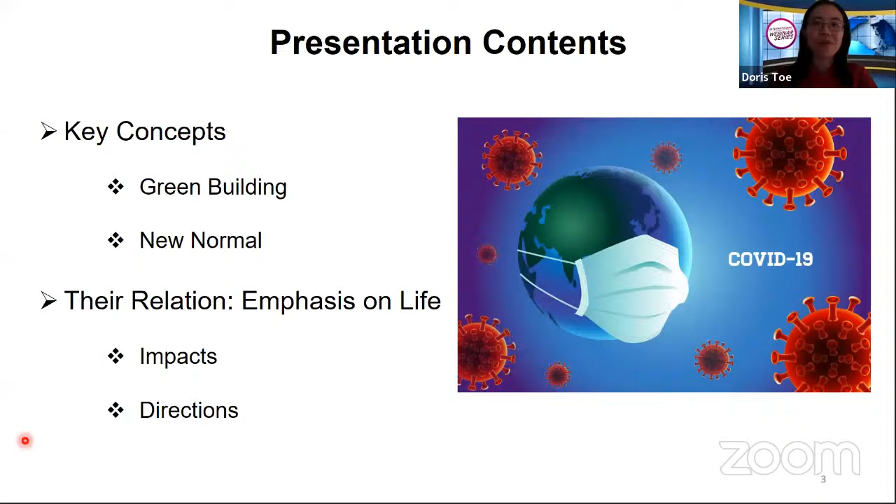According to the World Green Building Council, a green building is a building that in its design, construction, or operation reduces or eliminates negative impacts and can create positive impacts on our climate and natural environment. I think the second point is also very important: green buildings preserve precious natural resources and improve our quality of life.

At the end of this presentation, we will see that quality of life shall be an integral part of green building. So now, if we are asked to name a green building, what building comes to your mind first?

The World Green Building Council also outlines the features of green building, summarized here. I think the first few points we are very familiar with, including the efficient use of energy, water, and other resources. We can use renewable energy such as solar energy.

I would like to extend here that the use of renewable energy from solar energy actually covers everything, including if we naturally ventilate our building, we are actually using wind power freely, and the wind is actually generated from the sun.

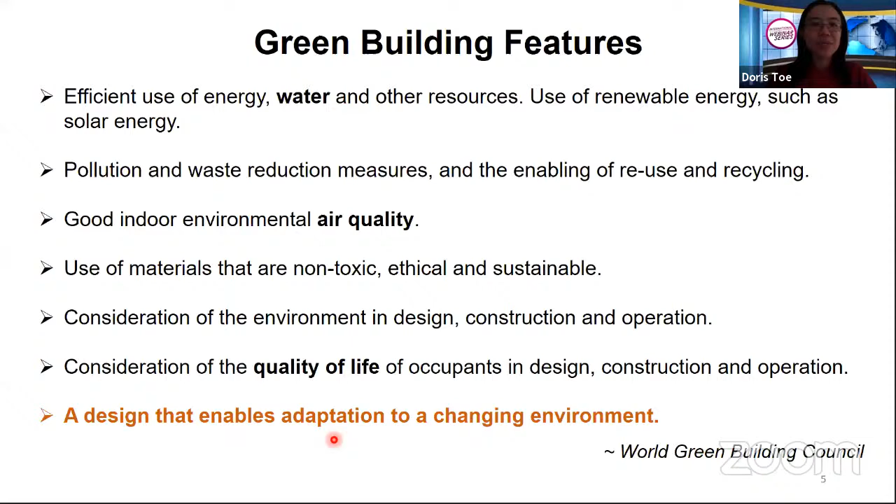On this slide, the picture on the left is interesting - it's the cover of a book, The Living House: An Anthropology of Architecture in Southeast Asia, showing a traditional house of Indonesia. I would like to point out that the way of life of local people since the past has actually portrayed the features of green building.

For example, the use of materials, how it is very much in harmony with the environment, how the people know their way of life and build according to it. In this photo, they are moving a house, probably to adapt to a better environment. The figure on the right is in the Philippines, showing children who look like they're playing, but actually they are preparing soil material which can become a building material to build their house.

So needless to say, this portrays or is in line with some of the green building features as explained in the previous slide.

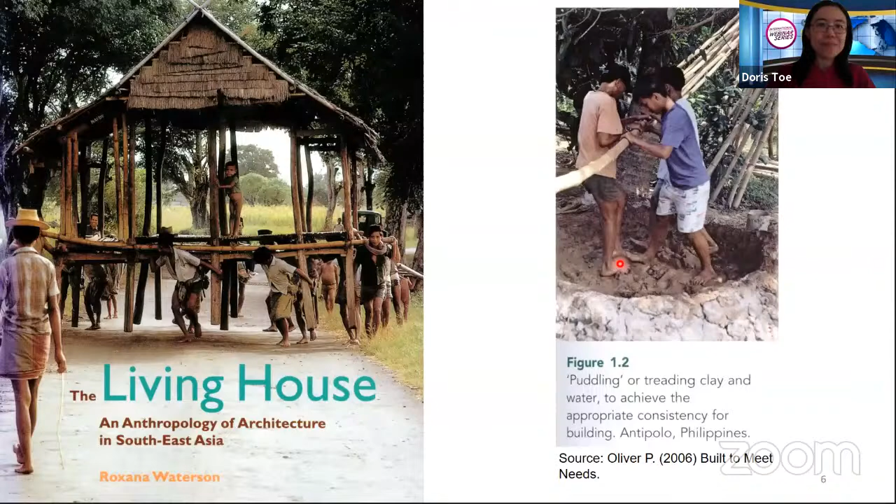Now I would like to highlight further from the World Green Building Council the key concepts of green building. The World Green Building Council says that any building can be a green building. However, it is worth noting that not all green buildings are, and need to be, the same.

This means green buildings are actually diverse, and diversity is a part of the richness of our world. Different countries and regions have a variety of characteristics such as distinctive climatic conditions, unique cultures and traditions, diverse building types and ages, or wide-ranging environmental, economic, and social priorities, all of which shape their approach to green building.

Following from here, may I derive that context and vernacular, meaning native, become a very important reference then.

Here is a world map which shows the Köppen-Geiger climate classification. As we are probably quite familiar, we belong to this tropical belt. Our area is here, and we are actually under the type of tropical climate, which comprises tropical rainforest, tropical monsoon, and tropical savanna. So in total, the Köppen-Geiger climate classification divides the world climate into 5 major types.

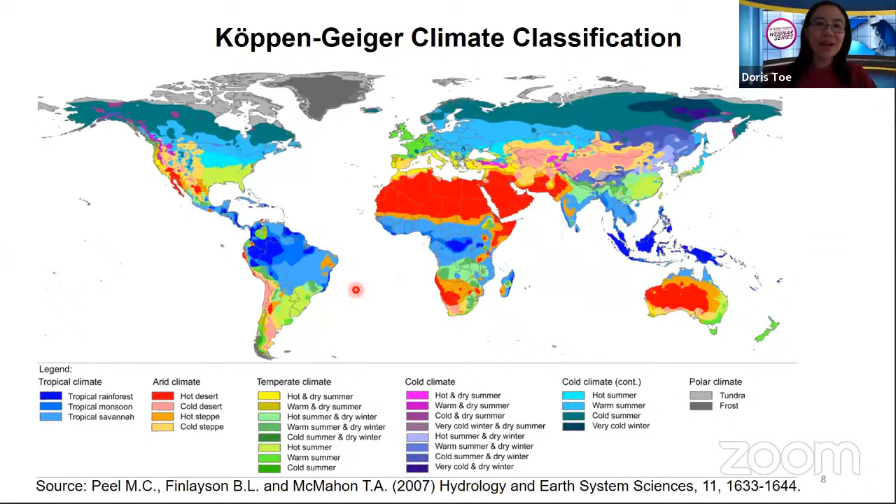So actually, if we take the 2 major influencing factors, which are climate and culture, we can actually see an outcome of a very rich architecture form, especially in the vernacular or traditional buildings.

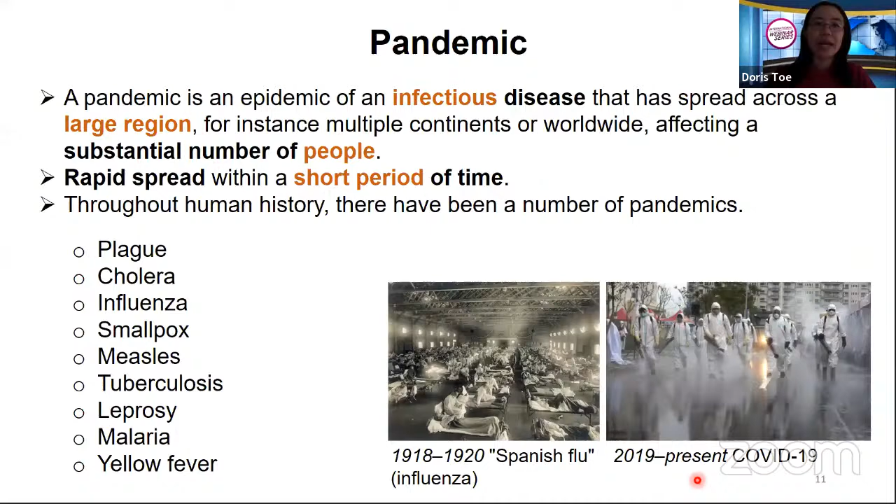And currently we are facing the pandemic of COVID-19. So the occurrence of COVID-19 actually led to our current day new normal life. So what does it mean? Having a new normal life basically means that we have to adapt to fundamental shifts to our way of life.

So for example, in Malaysia, we practice 3W and 3C. 3W meaning wash, that means hand wash, wear a face mask, and then warn, which means that we keep ourselves alert to warnings given out by the government or authorities. And then we have to prevent ourselves from 3C, which includes crowded place, confined space, and close conversation.

So besides that, we have to practice social distancing and queuing in public areas, for example at entrances before we can enter into a building. So this practice could be quite common, occurring in many countries today.

And besides that, we are experiencing a prolonged indoor living. In fact, actually modern way of living makes us stay a lot indoors, but under today's new normal life, our indoor living time is actually prolonged. For example, we are working and studying from home, and we also have more and prolonged online tasks.

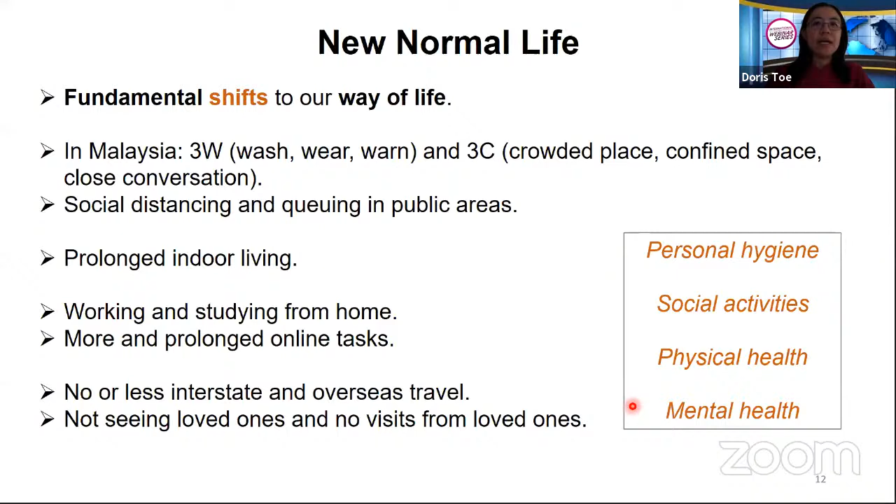At the same time that we are faced with COVID-19, we shall not forget that there are ongoing world challenges, for example climate change, and also housing billions of people in culturally and environmentally sustainable ways. It is estimated that vernacular dwellings constitute about 90% of the world's total housing stock.

If people are staying indoors a lot, and we are concerned that disease and climate change do not recognize boundaries, then it is essential to support vernacular building traditions and assist local buildings in terms of sanitation and disaster preparedness.

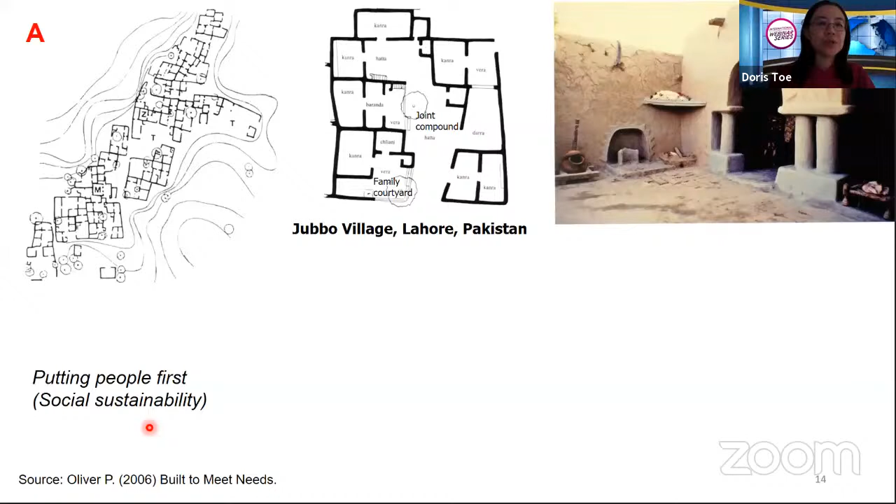Next, I would like to draw attention to the fact that putting people first in green buildings, the aspect of social sustainability, should not be neglected. Here I show two examples from the book Built to Meet Needs by Paul Oliver.

In the first example, example A, it shows the Jubbo village in Lahore, Pakistan, while example B is in Anatolia, Turkey. Both of these are housings or dwellings, and both are rebuilt houses after the place faced a disaster. However, in example A, the village was rebuilt back to its original form, while in example B, the new village was well planned, formal architecture and design.

However, a major difference is that in example B, although the new houses were completed, they remain uninhabited post-disaster houses. The households who were victims of the disaster refused to move in, although they were given these houses. Why? Simply because these houses could not meet the needs of the households, while in example A, the inhabitants could meet their cultural needs as before.

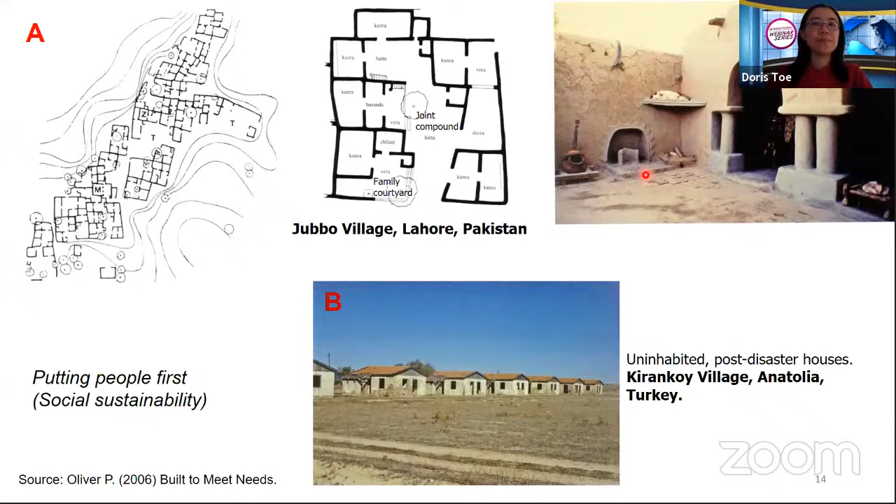Let's move on to the second part, which is very important. Now we will look into the relation between green and new normal.

The United Nations Chief Antonio Guterres said in his message that nature is sending us a clear message: we are harming the natural world to our own detriment. With the population doubling over the past 50 years and the global economy growing fourfold over the same period, the delicate balance of nature has been disrupted, creating ideal conditions for pathogens such as COVID-19 to spread. This was a message given on World Environment Day this year.

Meanwhile, the UN Environment Programme Chief Inger Andersen stated that healthy people and a healthy planet are part and parcel of the same continuum.

Therefore, the question of green building is not whether we need green buildings or not, or how many green buildings we need, but rather how shall we approach or realize the making of green buildings. In other words, it is about what direction we are going, and whether we have the directions for everyone or every kind of building.

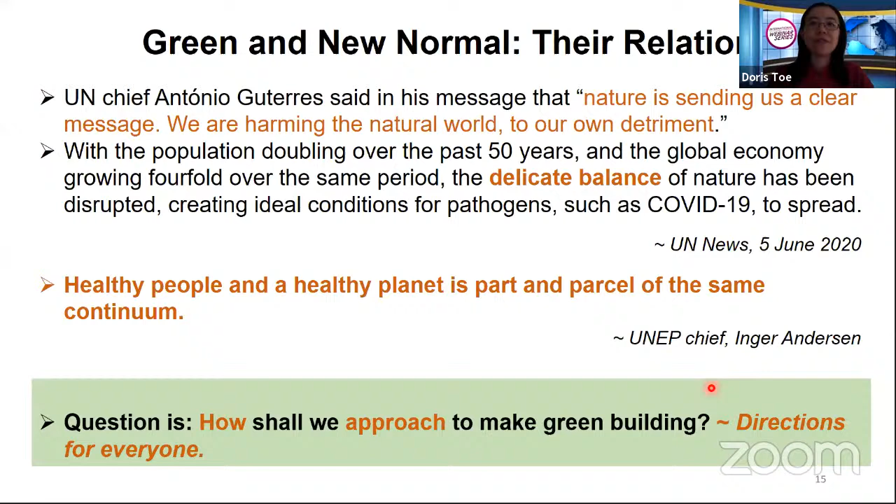Following the way of new normal life, a very major impact is the question of healthy living environments. For example, green buildings, just like the green building features outlined before, a very important feature would be having a hygienic environment and access to clean water. The next point is to have clean air and sufficient ventilation, for example for the purpose of contaminant removal. Another point would be about giving comfort to occupants, because we are staying indoors for prolonged periods.

So here I take the point of importance of ventilation and give two examples. The first is actually very old architecture, about 500 years ago, in Hyderabad, Pakistan. Although it is low-rise small buildings, the environment is actually quite high-density. We can see a very common and significant feature in this picture: it shows the wind catcher that every house has, and the wind catchers all face the same direction, facing the wind direction.

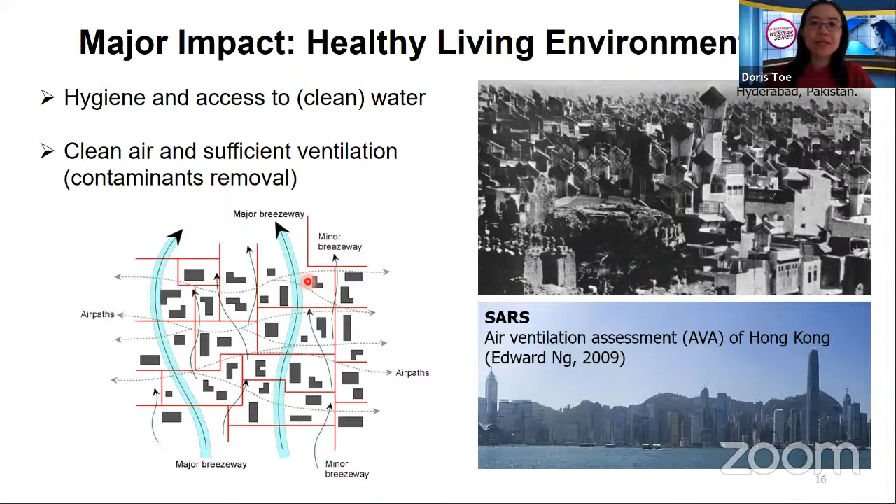Another impact on our healthy living environment is to make sure that we have green and open spaces to get a dialogue with nature, due to effects of prolonged indoor living on mental health, such as anxiety attacks and fear. As we might or might not be aware, elderly generations actually face such effects of anxiety, attacks, and fear as an outcome of the COVID-19 pandemic.

So it is pretty much known that green and open spaces can have a positive impact on our healthy life, not only in terms of physical health, but also psychology or mental health. This leads to the importance of indoor-outdoor relationship in our building spaces.

For us in the tropical climate, this has been part of our way of life since our forefathers' time. We live very much in connection with our outdoor environment, if we look at our forefathers' houses, for example. This indoor-outdoor relationship in buildings can be enhanced a lot if we have transitional spaces.

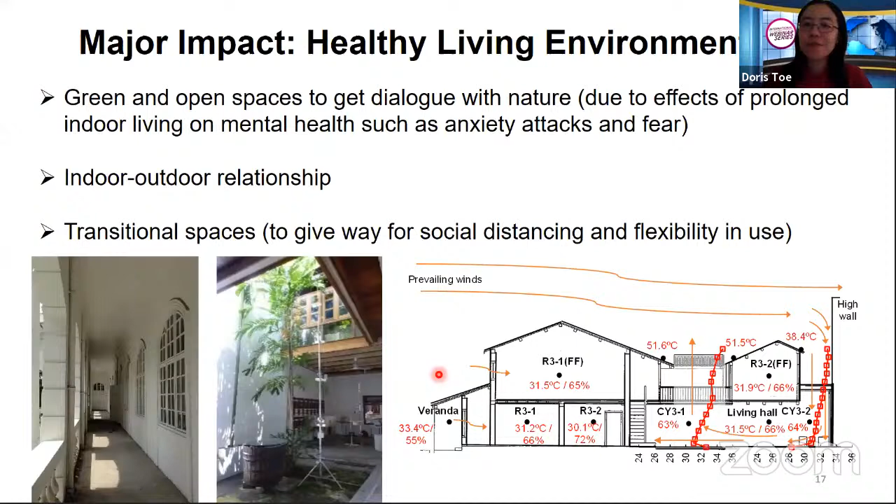There are also other impacts at a larger scale. For example, we might be concerned with proximity to supply chains and workplace from home, and also security in any emergency, such as our access to food and so on.

And another impact is reverse migration, whereby many urbanites actually relocate to hometowns and leave behind the congested, more risky mega cities.

So, in the end, what are the possible post-COVID green directions? If we recall back the presentation just now, green is for everyone, and going back to nature is fundamental.

Then local approaches become important. This is in line with having an important reference to context, which comprises our climate and culture, and also vernacular precedence could be an important reference.

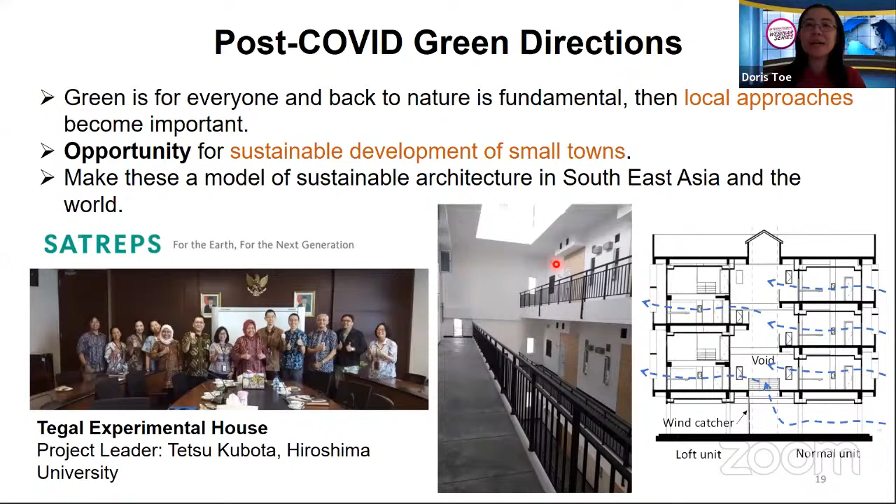So you can actually have easy access to make a visit to this house. This is a look of the experimental house, and the idea is to develop a low carbon affordable apartment, or what we call the Rusunami and Rusunawa, in the hot, humid climate of Indonesia towards the Paris Agreement 2030. It incorporates traditional ways of natural ventilation together with new knowledge into a modern living environment, and also affordable low and middle income housing. This is one example, but there could be other examples.

To conclude and recap the contents of this presentation: green building is not new. Any building can be a green building, and green buildings need not be the same, though they share the same green features as explained or referenced by the World Green Building Council. In light of the new normal life, every building should be a green building. And green buildings need to put people first, whereby social and environmental sustainability have to come together.

Because green building is not new, the question is how shall we approach making green buildings? Here, context and vernacular precedents become a very important reference. Major impacts from COVID-19 are to consider healthy living environments and going back to nature. The post-COVID direction broadens opportunity for green buildings of small towns in a humble way.

This is the end of my presentation. Thank you very much for your attention, and further discussion or questions are welcome. Thank you.

Okay, thank you very much, Dr. Doris. You can stop your screen sharing. Yes, by the way, I might have taken a longer time. It's okay because it's a very interesting talk, and I want to ask you many questions actually, but later we will.

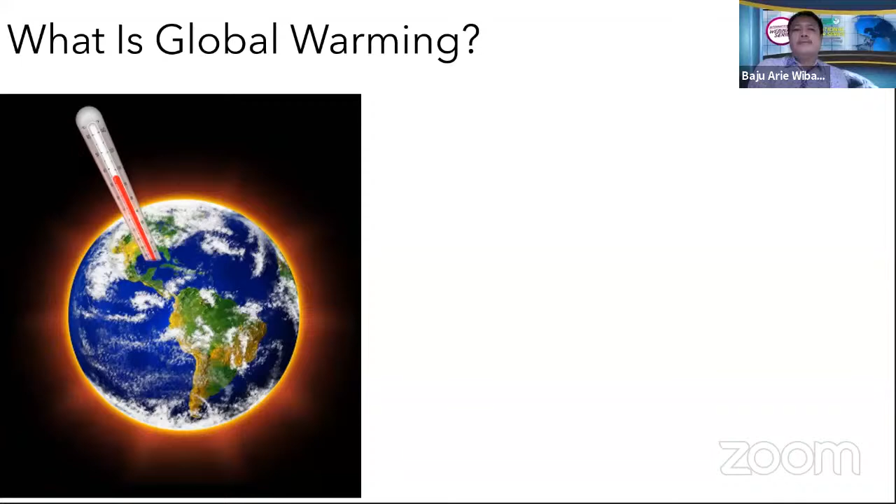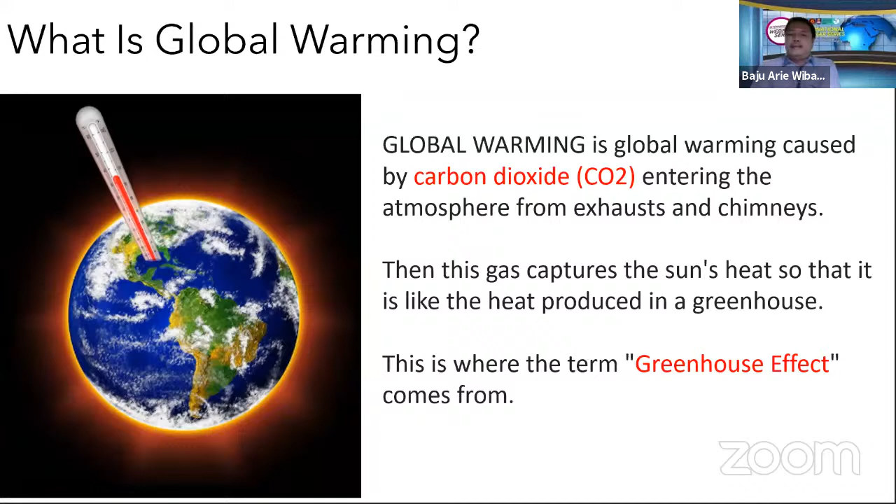If we talk about global green building, we have a main issue about global warming. This is about the impact of carbon dioxide on this earth. It increases the temperature, and that's called the greenhouse effect. The impact of global warming, we can see many things: melting glaciers on the poles, rising sea levels, increasing hurricane disasters, and others. But now I will talk about a new disease, especially COVID-19. This is one of the impacts of global warming, I think.

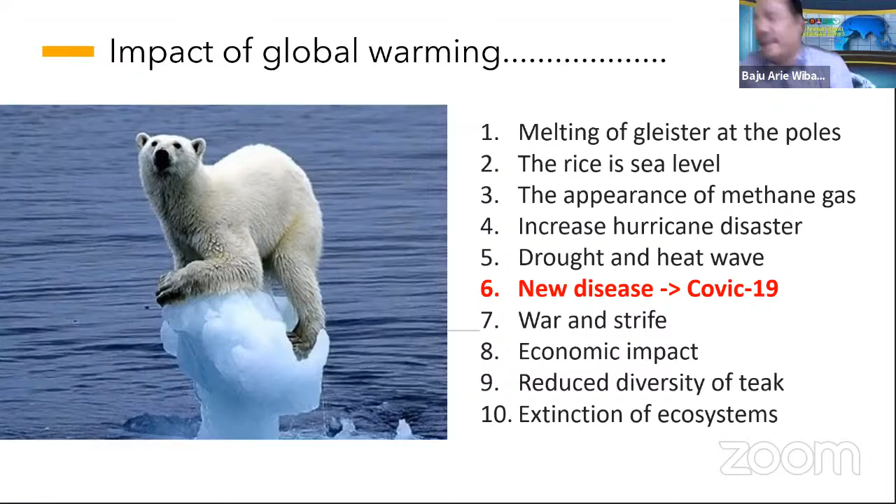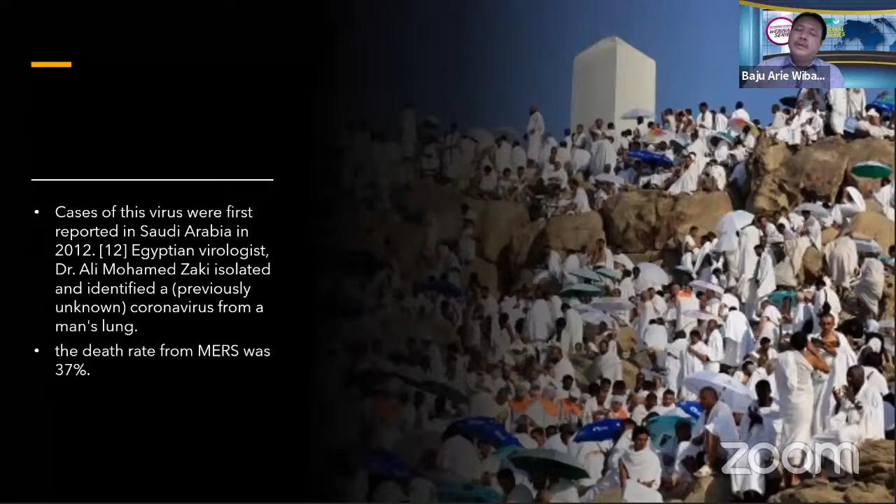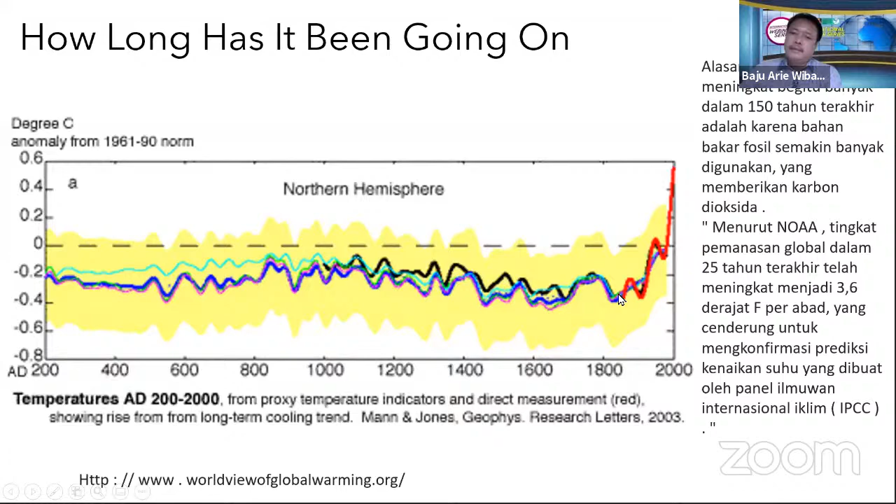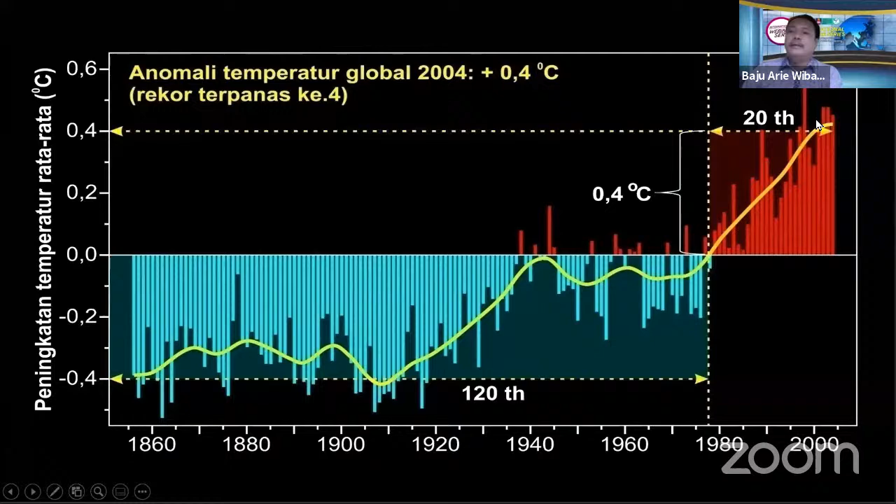This is Ebola, we can see every year. In 2015, SARS, MERS, and now COVID-19. This is related to higher temperatures. In the last century, last decade, around the 20th century, this is a figure of high temperature at several times, and we can see in this decade from the 20th century the temperature has increased very high. This is the line on the right, we can see. So if this appears since 1980 until now, the temperature increases, growing up. From the 90s and 80s, it's growing up very fast and very high. We can see this in the 20th century.

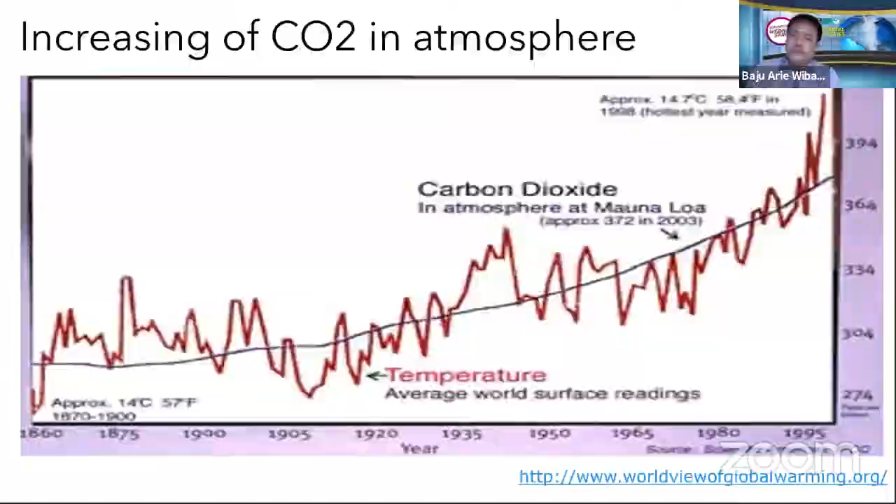This effect: before sunlight from the sun crosses the atmosphere and enters the earth, several sunlight can reflect back outside. But with added greenhouse effect, several sunlight that could go outside reflects back to the earth. This makes the earth warm, more and more over time.

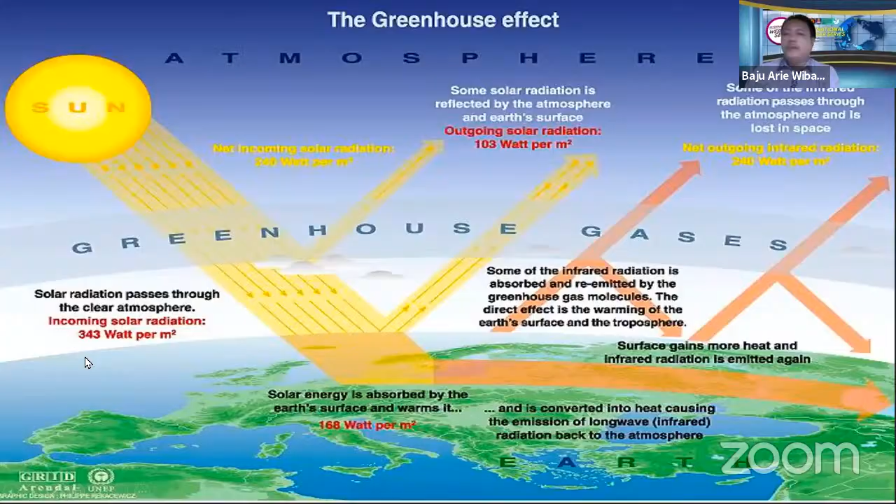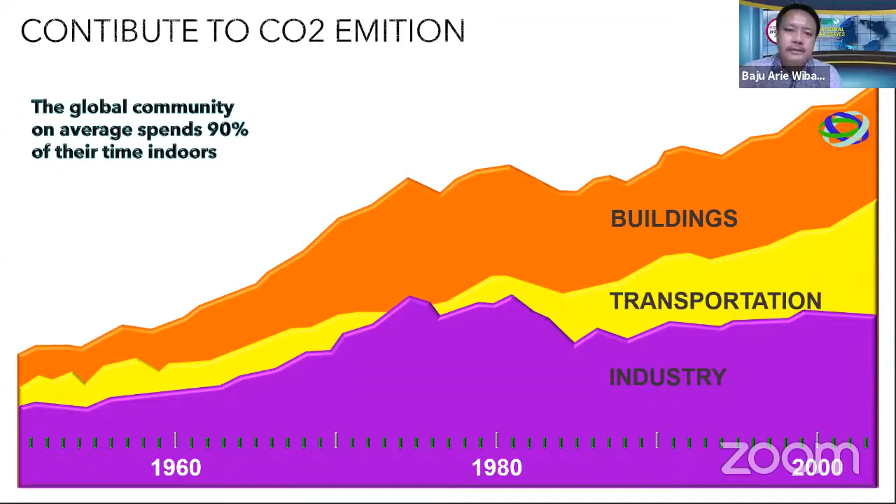So what is green building? This is a green building. Yes, maybe, but that could be not accurately true. Green building actually talks about three things. The first is about natural resources, energy, and material. The second is environmental impact - let's talk about site, waste, and others. The third is indoor air comfort. There are three kinds: indoor air quality, comfort, and noise level.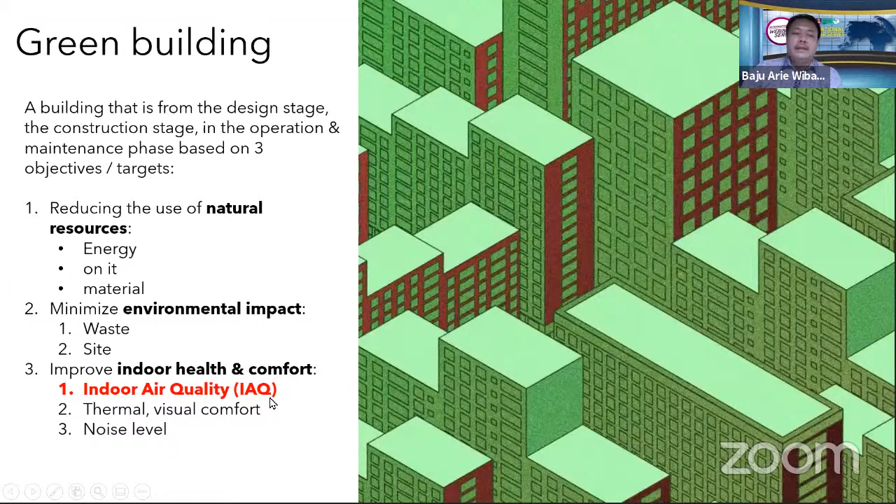Now, this time I will talk about indoor air quality, and the trend of green building in the world.

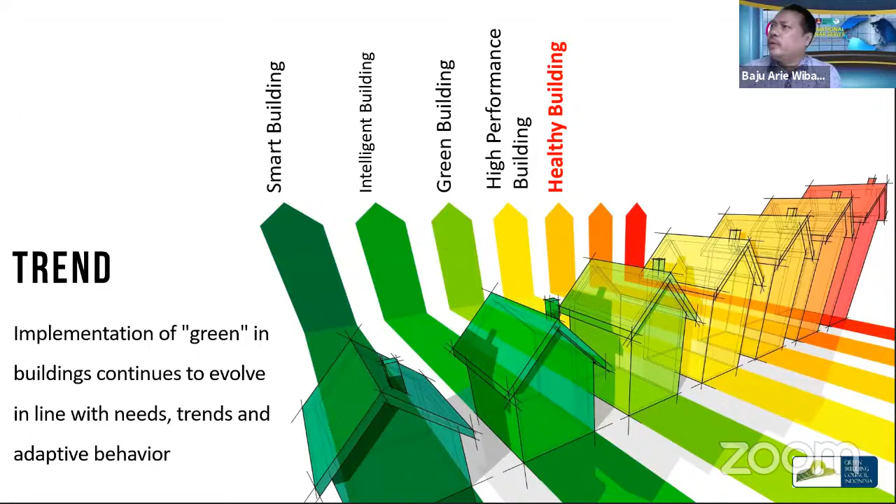Actually, in Indonesia there are several phases. The early green building issue talked about smart building, how lighting can turn off automatically by sunlight, then the next step is intelligent building with building automation systems. So we develop to green building, and next to high performance building. Let's talk about building performance, and next we talk about healthy building. This is a very important thing, more than just high performance of building. This aspect we can see in this era about COVID-19, and then we talk about net zero building.

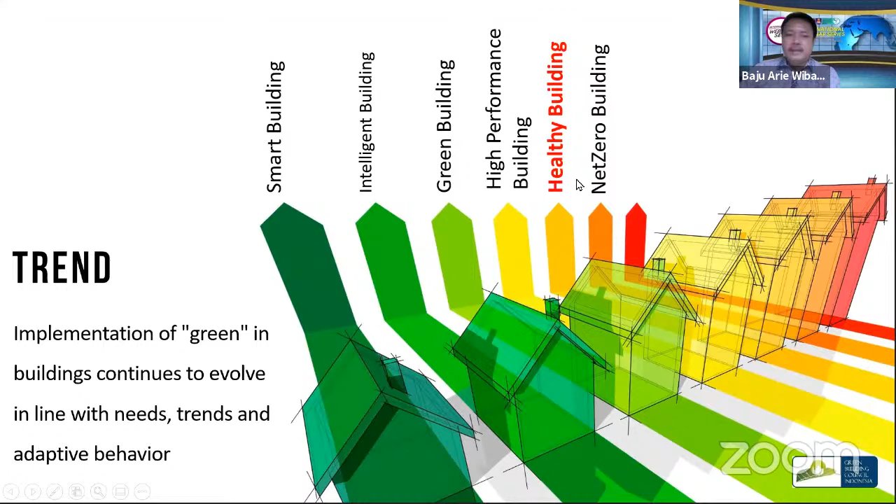Healthy building: a better place for people. This is a global project that aims to create a world in which buildings are not only good for the environment, but also support a healthier, happier, and more productive life in the building. We don't just talk about environment, we now also talk about productive life, happy and healthy for all people who use the building.

And next, net zero carbon building. This is now what we want - from green building we can decrease carbon dioxide to the earth. So we hope all people can decrease the increasing higher temperature of earth.

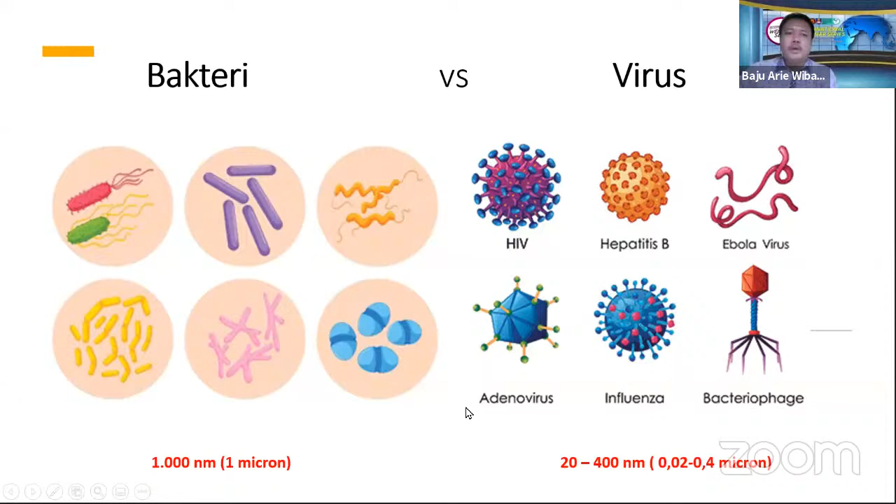So now let's talk about air quality in healthy building, related to the COVID-19 virus. This is a bacteria, and this is a virus. We can separate them by dimension - the bacteria is about 1,000 nanometers, but the virus is 20 until 400 nanometers. This is much smaller than the bacteria.

How does COVID-19 spread? COVID spreads through droplets and aerosol from carriers, through the nose, mouth, eyes, and others. COVID-19 does not spread through airborne transmission - this is important - but it spreads through droplet and aerosol. Droplet and aerosol are released when we sneeze, cough, and even during normal breathing.

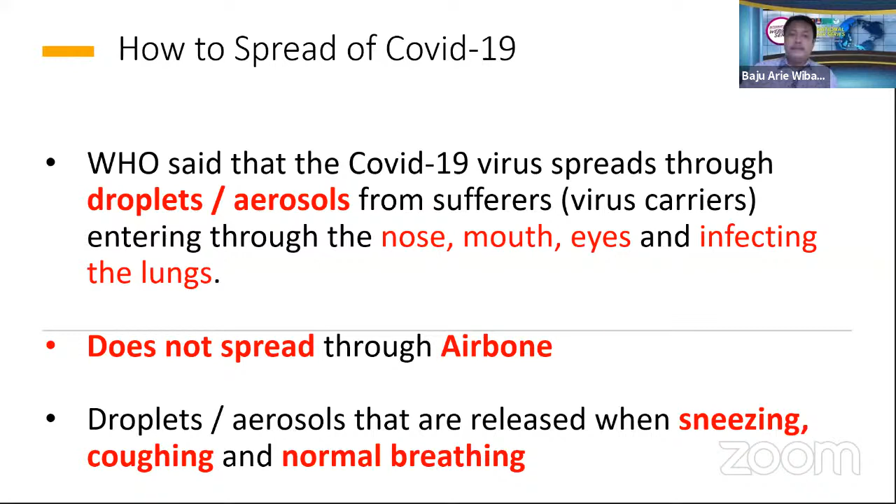When we sneeze, we can see every particle throw out from our mouth, and we can separate it into several parts. The first is aerosol, with dimension lower than 10 microns. The other, larger dimension, makes a long distance difference. The droplet can spread up to 6 meters, with sneezing speed more than 50 meters per second, but we generally consider about 2 meters distance.

So droplets from sneezing and coughing spread into two parts: particles lower than 10 microns we call aerosol, particles more than 10 microns we call droplet. The aerosol, with dimension under 10 microns, can stay around the sufferer about 2 meters and remain in the air about 3 hours. This is a very important thing, so we need physical distancing of about 2 meters.

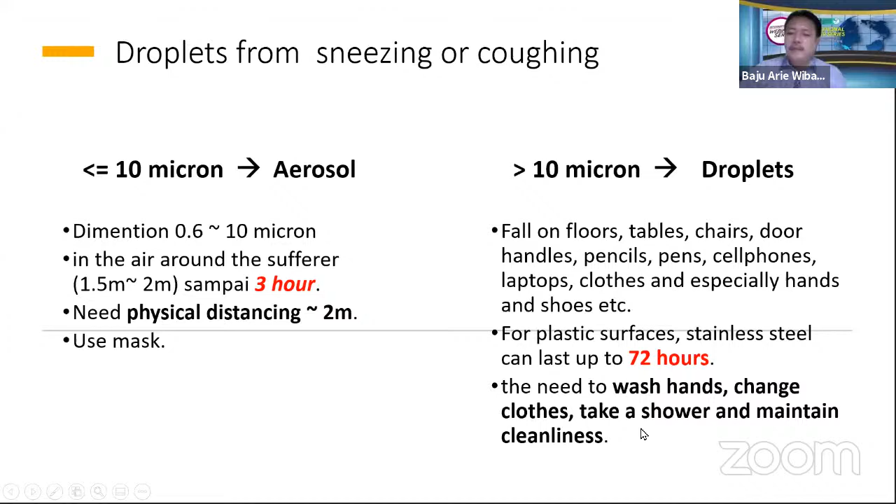Now we use a mask. The bigger particle, called the droplet, falls down onto the floor, table, chair, door handle, pencil, and others. On plastic surfaces or stainless steel, it can stay alive until 72 hours. So with droplets, we need to wash hands, change clothes, take a shower, maintain cleanliness, and others.

This is about several journals I reference. Aerosol can last up to 3 hours. The particle virus in our... can live about 3 hours.

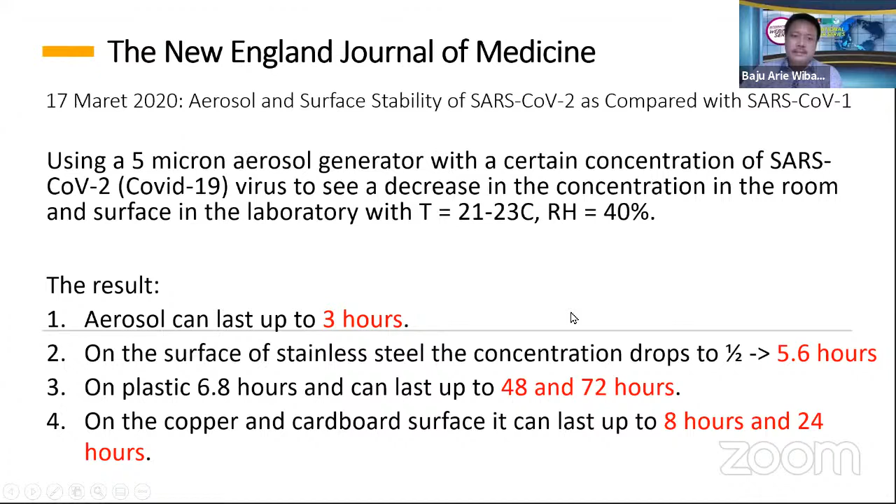In Australia, recommended we use closing the building - mall, meeting building, museum, cinema, and others that must be closed because it's very dangerous, depending on the direct contact between humans.

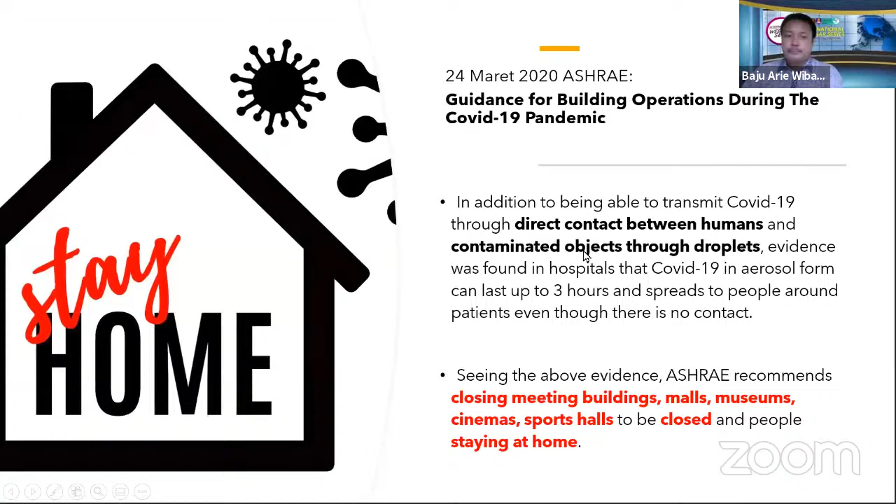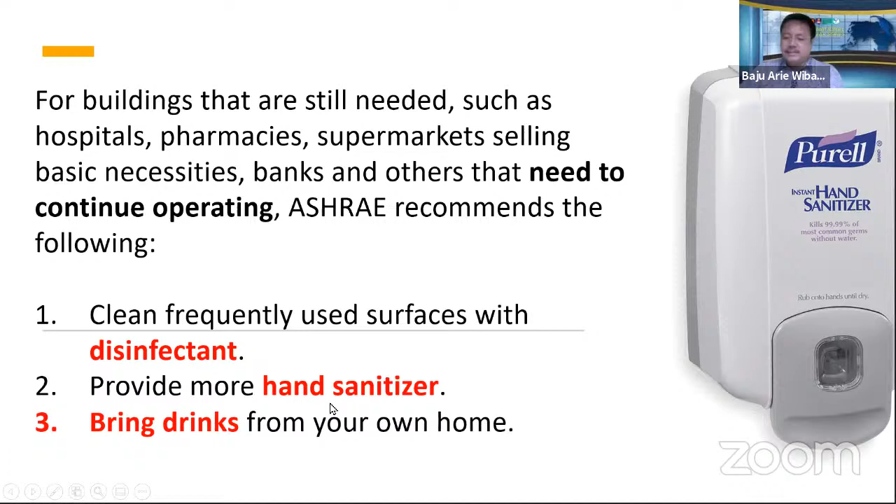So for the building, we need to continue operating - the building operates like a hospital, office, public service. We need more disinfectant, clean frequently used surfaces. We have provided more sanitizer, so we can bring drinking from the home.

And the building they use in this era, we need more open windows to let outside air enter the room, the building as much as possible. This talks about concentration decrease of virus in the air. This is important to decrease the virus to eliminate infection to other people.

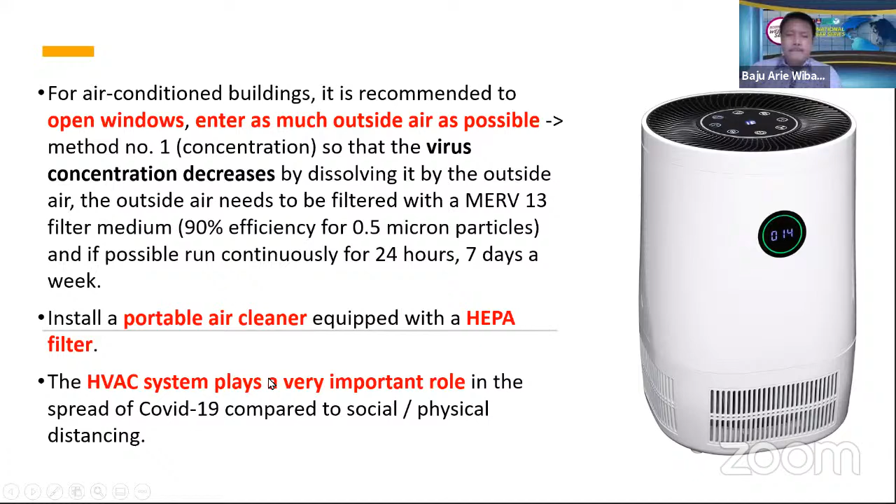We can use a portable air cleaner with HEPA filter. So the last - 2 persons without clinical symptoms, asymptomatic. This has happened for 3 days.

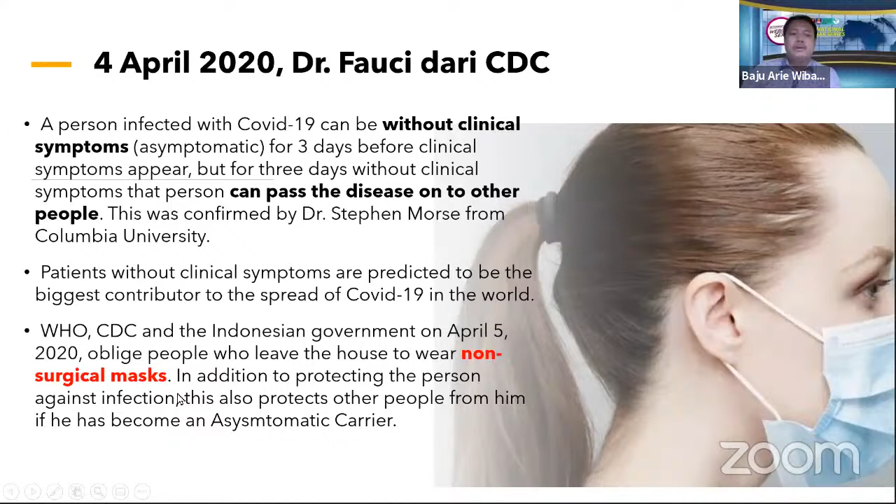So this is what happens - we need several actions for COVID-19. The first time you can see this, months ago, territorial lockdown. So extra personal hygiene, individual protection, and physical distancing, because more than 90% of people take that time indoor in the building.

We talk about a healthy building. We need healthy building conditions. The first, I think this is the same - the elements of indoor environment quality. We talk about things like sound quality, lighting comfort, thermal comfort, air quality, outdoor air quality.

Now I will talk about air quality and outdoor air quality. They say maybe we talk about comfort quality, thermal comfort quality too. This is exposed inside the building. In the room, in the building, there are many things.

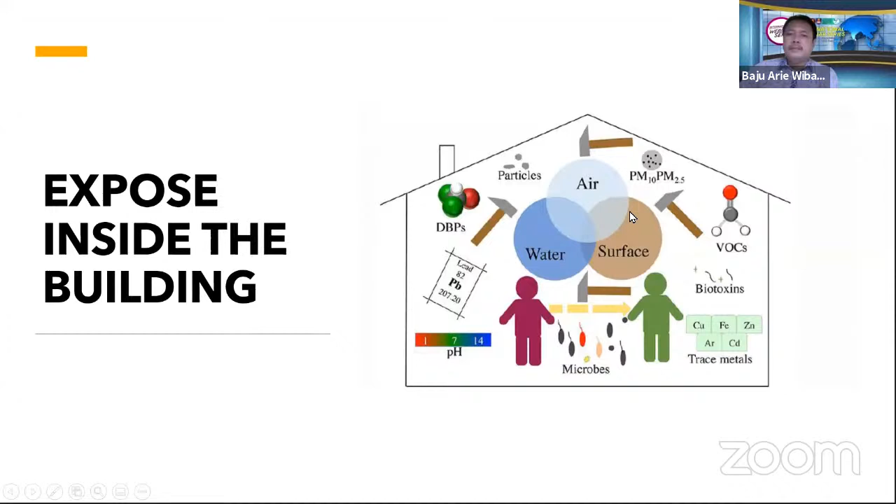Entry has many pollutants to the air, to the water, to the surface. This time we talk about pollutants to the air quality in the room. To improve indoor air quality, there are 5 factors that cause people to get sick.

The first is dose - this is about concentration of virus. Site, virulence, time, level of defense of people. So we will talk about concentration of virus in the air for this discussion.

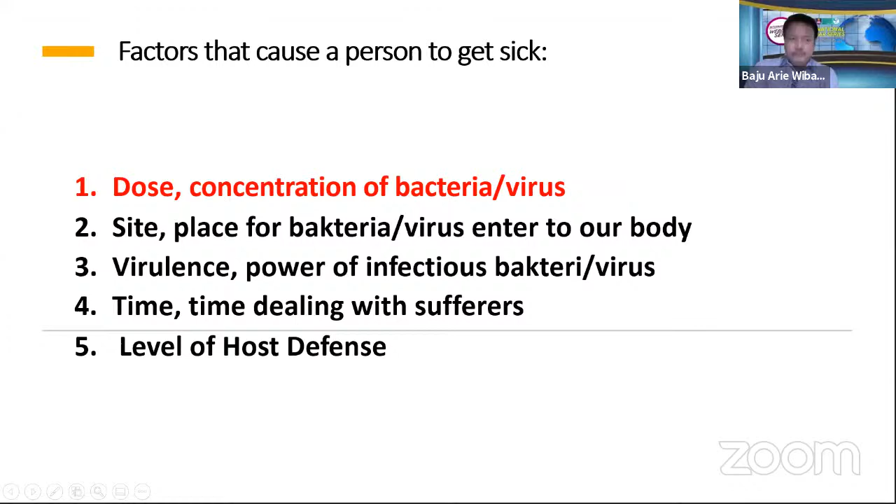In the room, in the building, we need to decrease the concentration of virus. We need air change per hour. Air change is the number of air changes that occur in the space.

This is needed to obtain thermal comfort - warmth, humidity - and needs to replace outside fresh air by cooling or drying. The need for air change depends on space function, people density, humidity, and air temperature.

So we can talk about air pollution - how we can decrease the virus in the room, the building. But first, the air change per hour is to dissolve and clean substances, virus, in the air in the room.

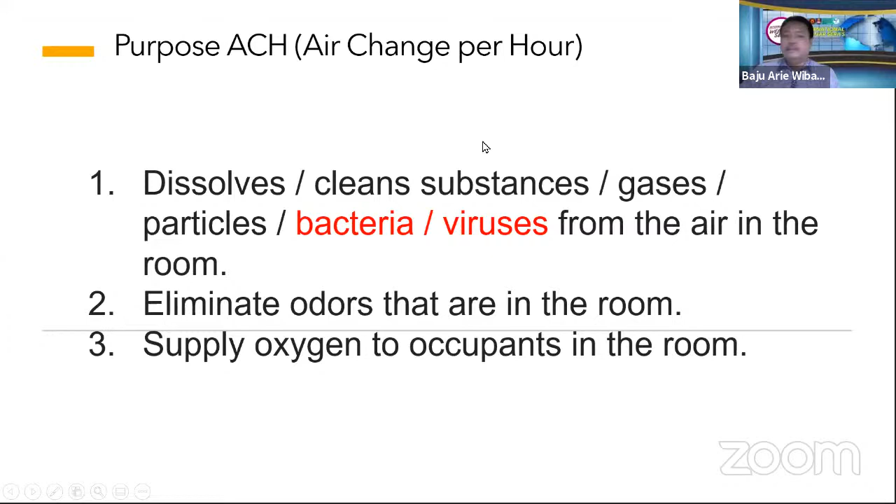The second is to eliminate odor that is in the room. The third is to supply new oxygen. This is to talk about decreasing the virus in the air.

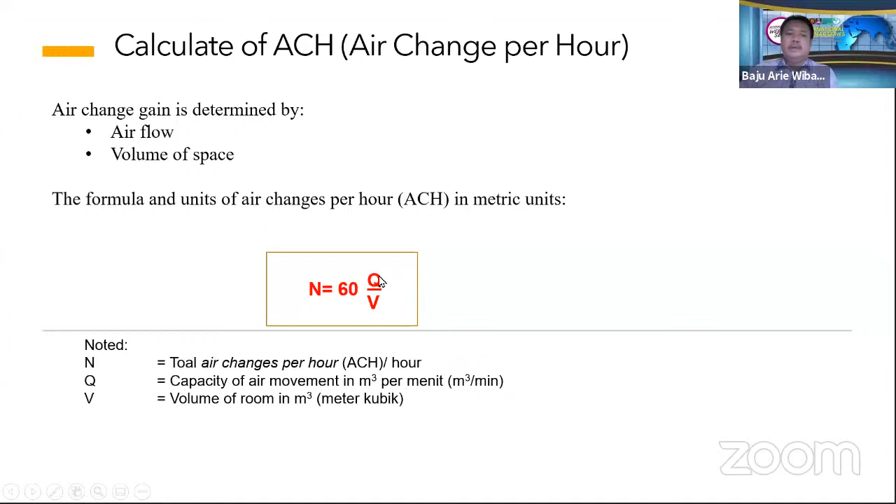We can calculate how much fresh air to introduce to our room. From this formula, we have a standard of air change per hour. This formula shows that in an office building, we need about 6. This is a standard in the normal era, but in the new normal, in COVID, we need more.

This is a standard for air movement, for people walking, meeting, toilet, and other activities. This is a standard for each person. So if we have 10 people in the room, we can use this standard based on these people.

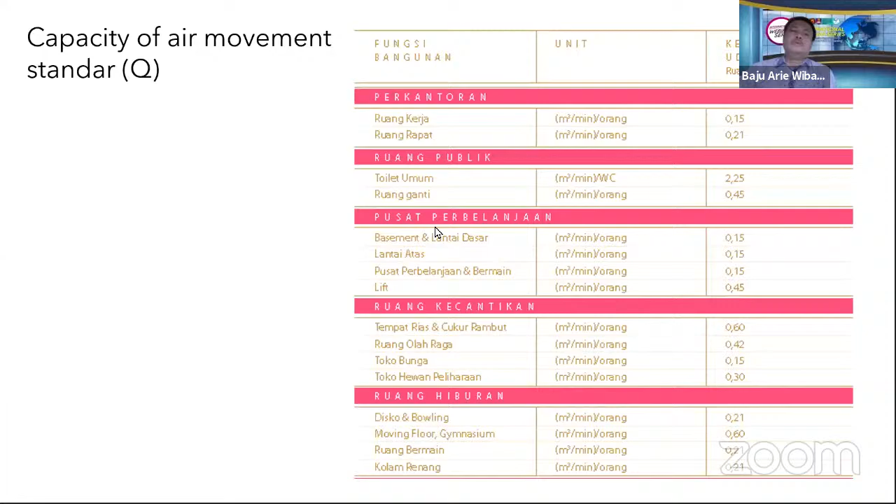Okay, next this is the other - to decrease the concentration of virus in the room, we can first use natural ventilation. This is what Ms. Doris talked a lot about. Thank you.

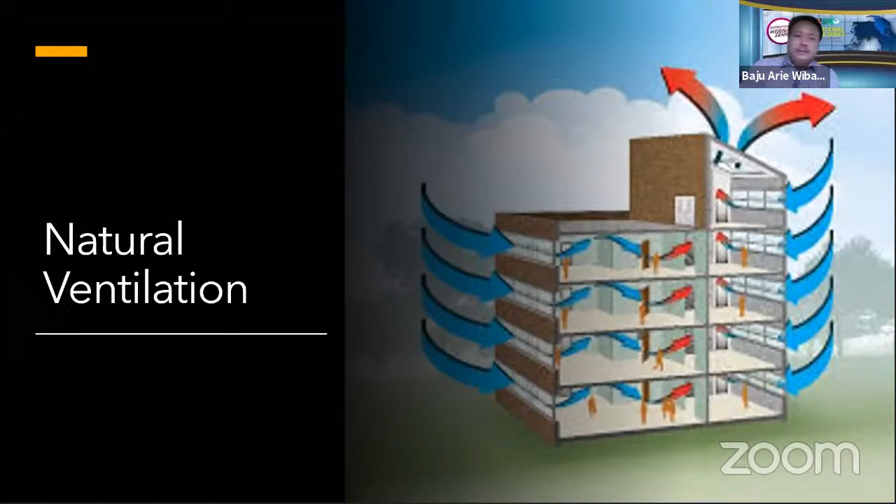So there are many kinds of ventilation. This is from one side of the building - we can see fresh air enter the room, and the air from the room gets through.

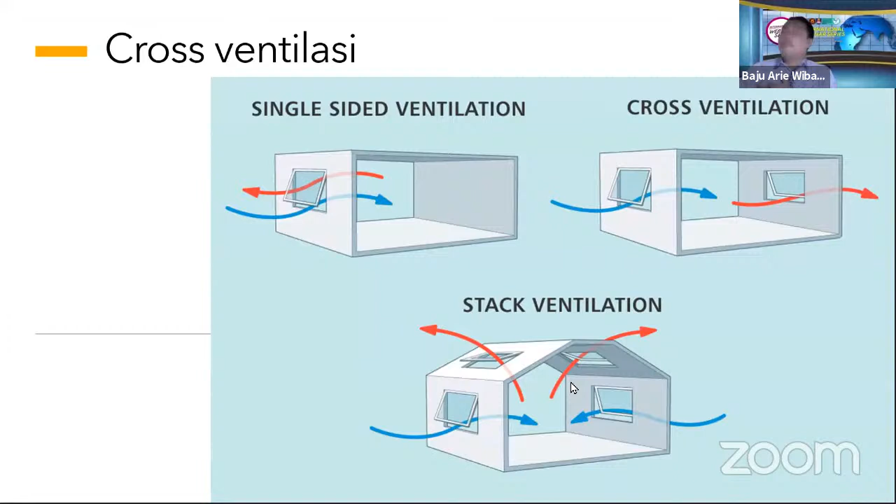This is cross ventilation - we have more than one opening or window on the side of the room, side of the building. So this is more effective than the single side. We can see the stack ventilation - this is more helpful to decrease the virus in the room.

This is a flaw. This is the concept of cross ventilation. With natural ventilation, we depend on the airspeed and the surrounding environment of the building. If the surroundings of the building are lower, this can actually happen.

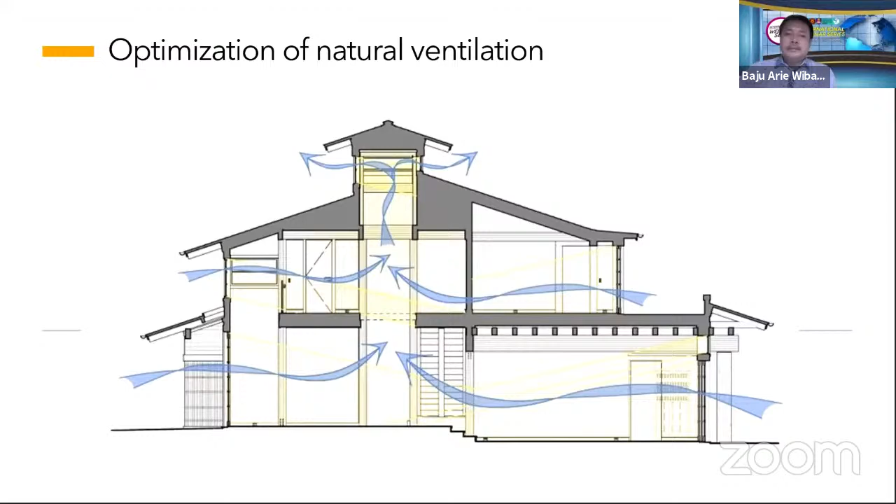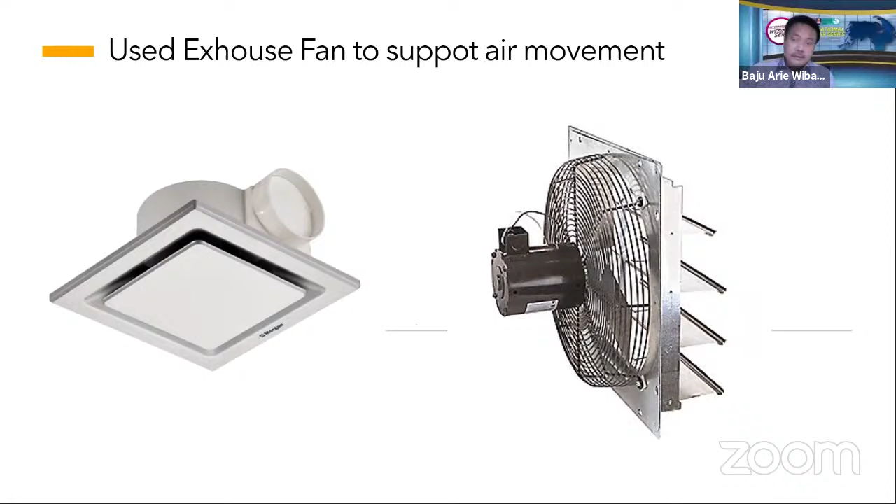So we can use an exhaust fan to support the movement. We can implement this on the wall or ceiling to supply fresh air from outside the building to inside. We can calculate the needs, the volume of the room, depending on the total people in the room, so we can choose the flow capacity of the exhaust fan.

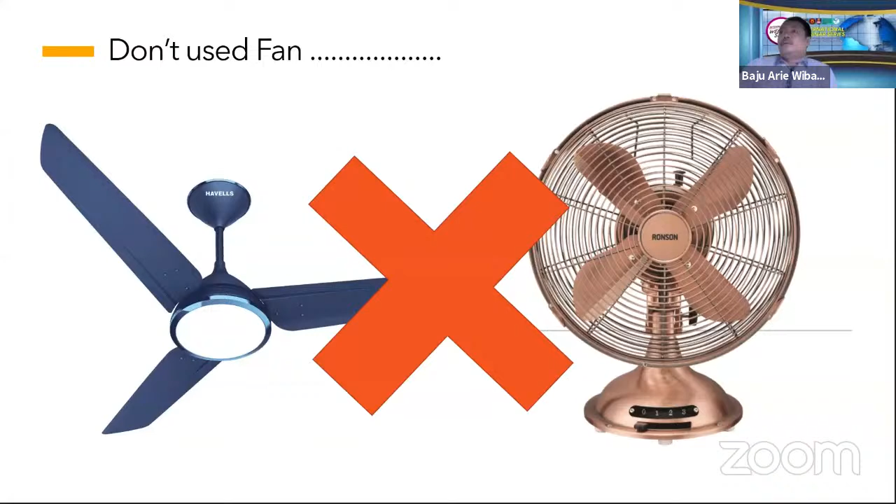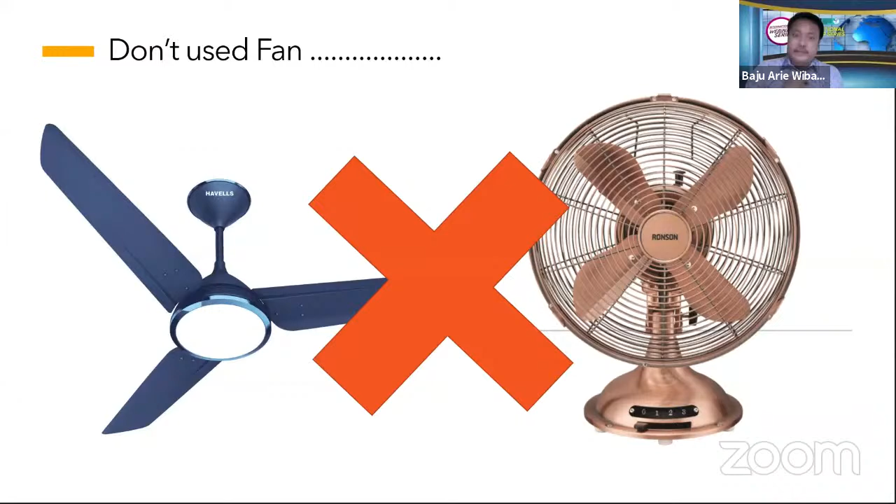But in this era, we don't use a fan like this because the equipment can't help circulate fresh air from outside. This just makes air movement stay stuck in the room, so this is not recommended for COVID-19. Now the second point, we talk about HVAC, air conditioning in the room.

This is an important thing because now what happens is people have more activity in the building, but they use air conditioning.

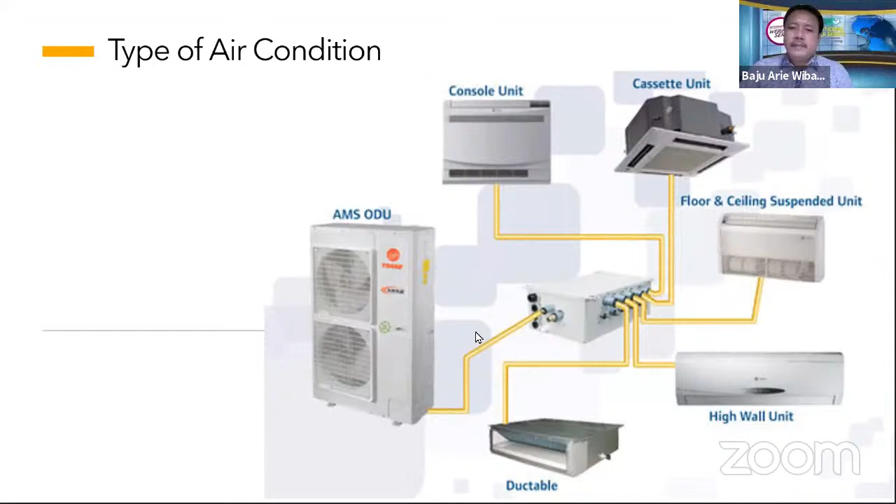We'll talk about one by one. This is a single split without a machine. This is the most common type of air conditioning used in the world.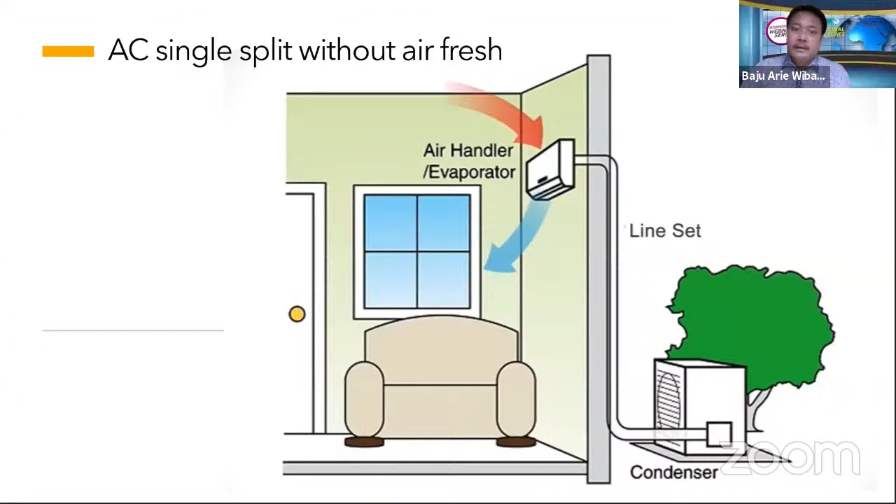We have the indoor unit, the FCU, in the room, then the condenser outside the room. This has no fresh air introduced to the room - nothing. It just circulates air within the room. This is very dangerous for COVID areas, so we need to introduce fresh air by opening windows, adding exhaust fans, and other methods.

This is a split type. There are several types. We have ones that bring fresh air from the outdoor to indoor. This is good for COVID-19.

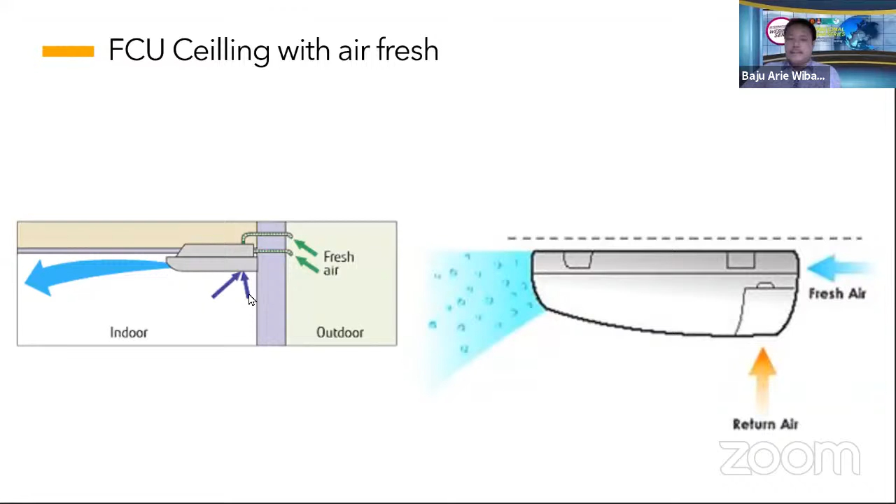This is a ceiling cassette. This also has fresh air flow from outside, but actually in Indonesia, in my campus, this fresh air system is not implemented.

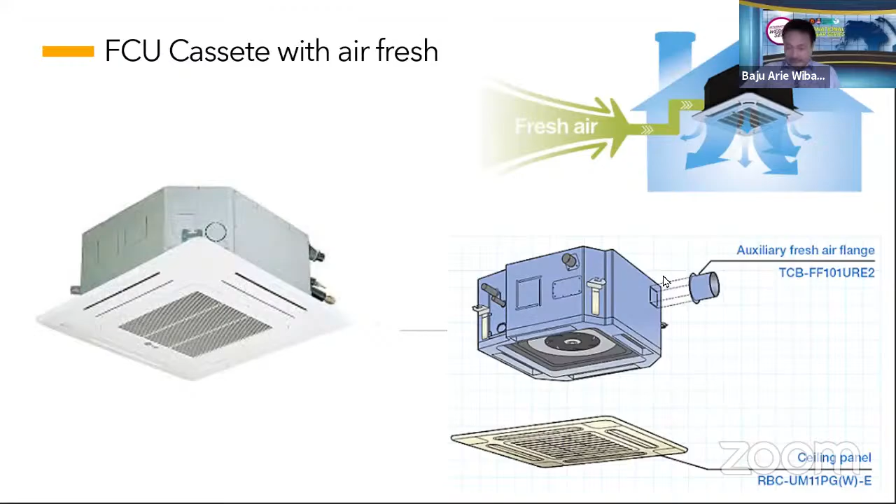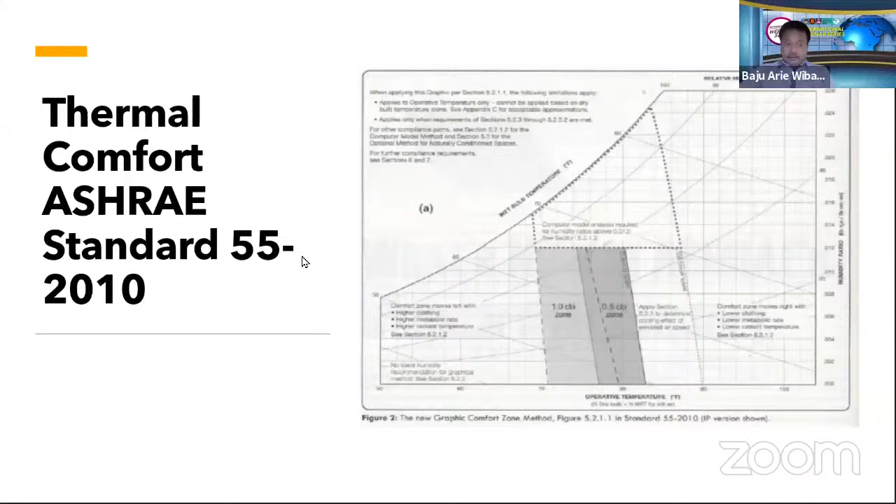So we can use opening windows or exhaust fans. We need more equipment because we have a thermal standard in ASHRAE - the temperature level is about 24 to 25 degrees, the humidity about 55%, and a certain airspeed.

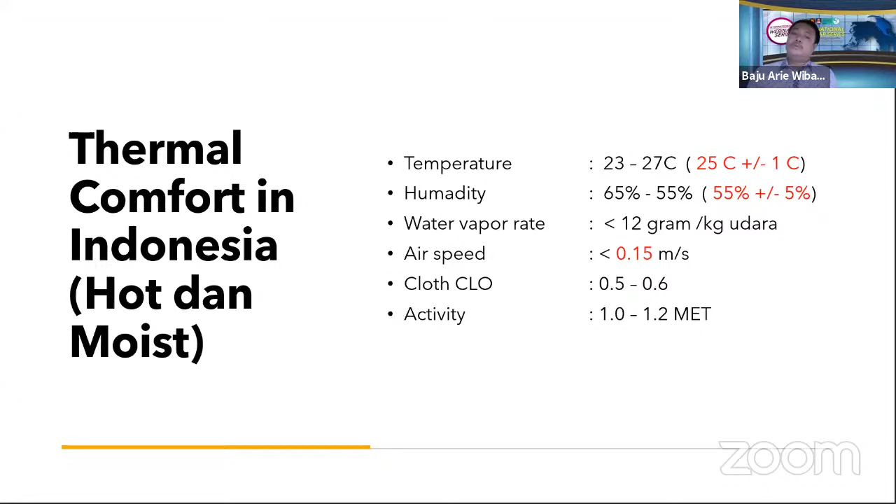So to make thermal comfort, we can use only in-house fans, because if we use fresh air from the outside, it has more temperature and more humidity - this is hot and humid in Indonesia.

The AC unit must be bigger by about 25% capacity, increasing energy consumption. This is a big problem for cost and operation of the building.

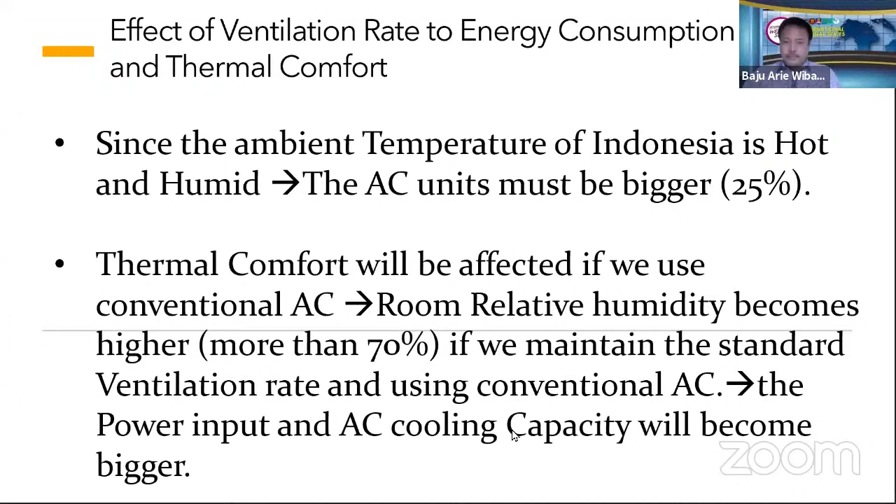From thermal comfort, if we use a conventional AC, we use outside fresh air with more than 70% humidity. This needs more power input and consumption for the air conditioning system in the building.

So in this case, we need a DOAS system - Dedicated Outdoor Air System. This adds equipment to introduce fresh air to the room, because we need to maintain fresh air while managing the high temperature and humidity.

We can filter the air first. We can use a HEPA filter, so viruses and bacteria lower than 5 nanometers cannot enter the room. Then we have a cooling coil to adjust humidity, and then the FCU, so the air supplied from outside to the room has lower temperature and lower humidity.

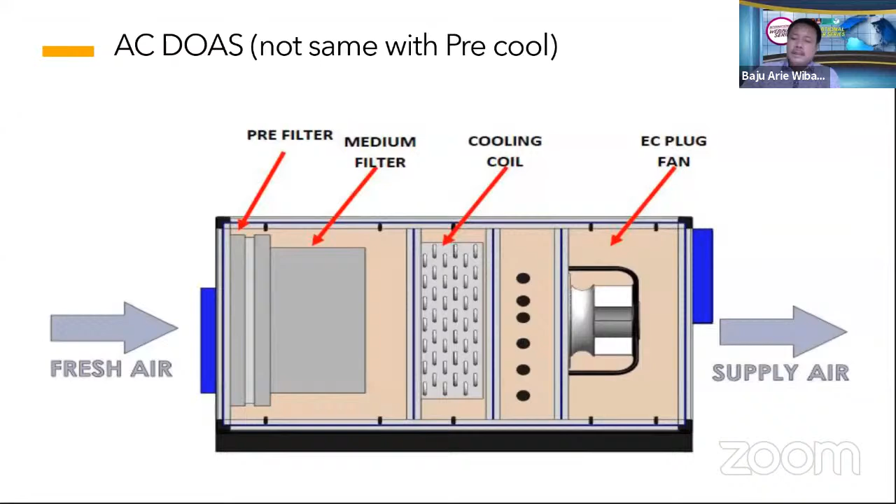This is important to decrease the concentration of virus in the room. This is the purpose of DOAS: improve indoor air quality, adjust humidity, decrease carbon dioxide levels, reduce VOC levels - these things help dilute virus or bacteria.

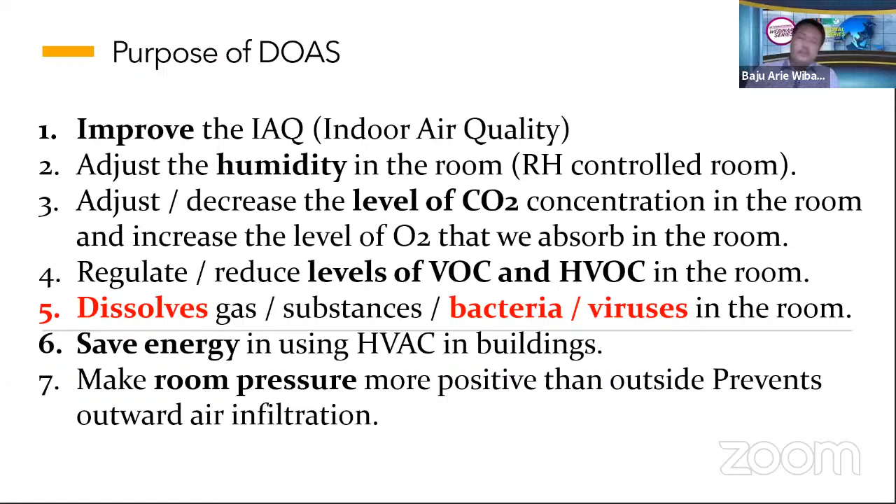With DOAS, we can save energy using HVAC in the building. So these are several types we can use to improve air quality in this new era. We can add the DOAS system to the room, to the building - that's just a support system for the building.

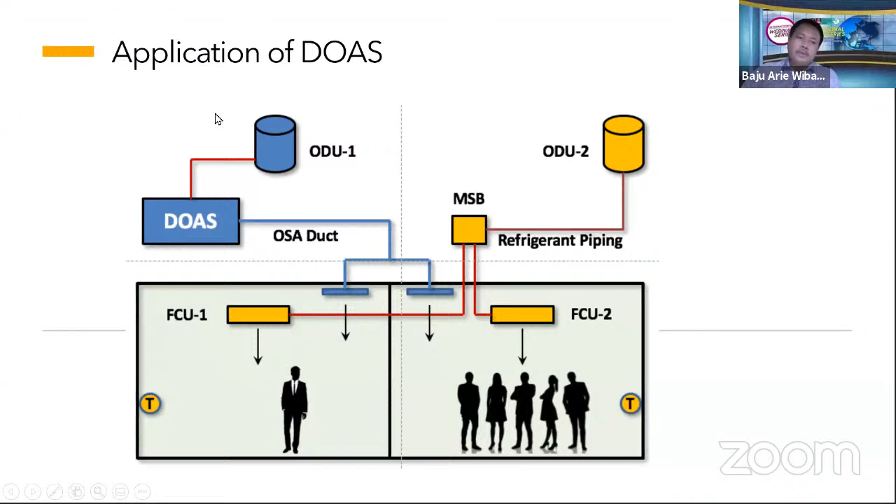This red line is the refrigerant. This blue line is the DOAS system - these are the machines. This is very complex, so the budget is higher too. Actually, this is needed for bigger, higher buildings.

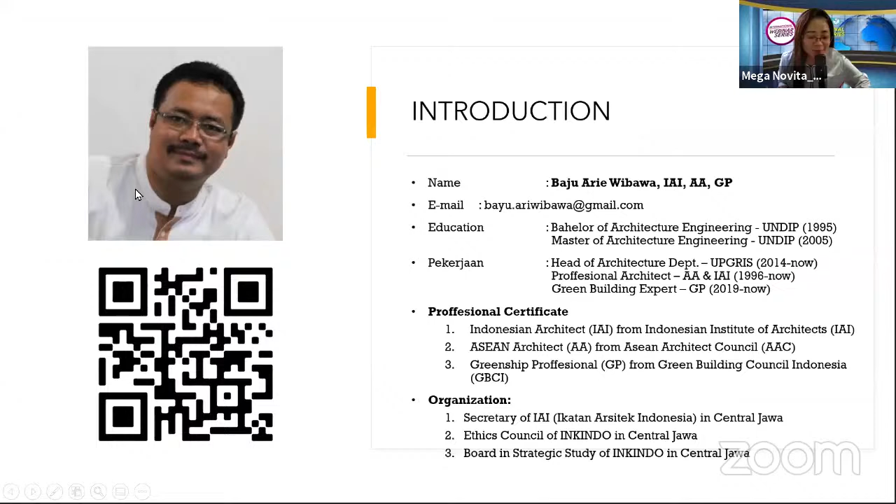Well, I don't think we have a question yet, but I really want to ask many questions. Actually, I really interest in architecture and its collaboration with another multidiscipline field. Wait a moment. Okay.